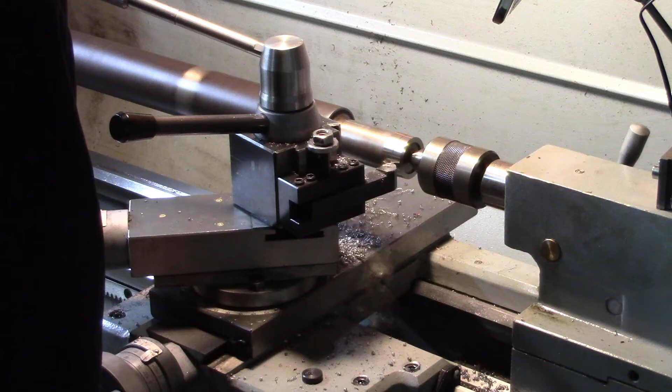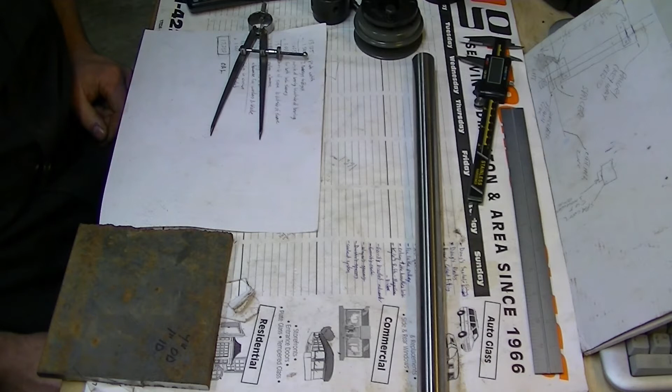Okay, well, for today's project, an uncle of ours has a little bit of a machine he's building. What he's wanting to do is build a concrete cutter using a concrete blade, typical however many inch blade it is. And so we picked up the blade, but he has some pillow block bearings, and we have a piece

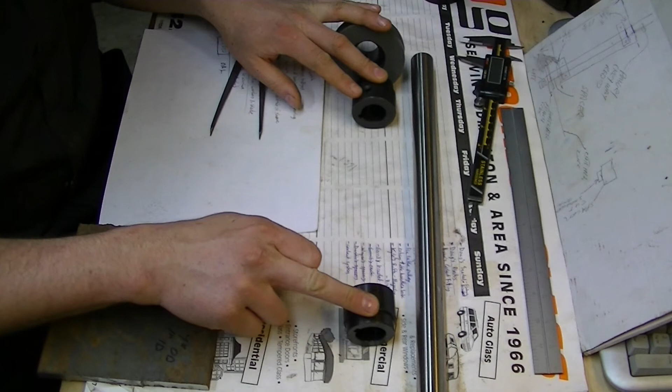of shafting here. What he wants to do is he wants to put the pulley with a keyway on the one end, except he has to space it off from a couple pillow block bearings, using a spacer on the one side, spacer on the other side to the other pillow block bearing, and then we need to make a couple 4-inch slightly concave washers to go on this end to sandwich the blade.

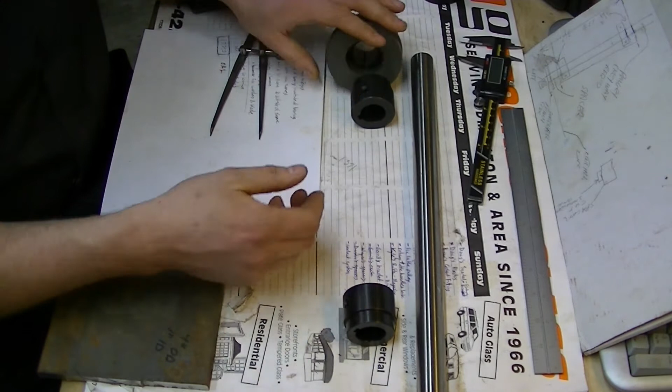Then on this end, outside of that, I have to cut a left-hand thread because of the direction this thing's turning. He doesn't want the nut coming loose on him. So this is what I got for a diagram. He drew it right on the back side of the package for the blade, which is nice because I have the blade to test with.

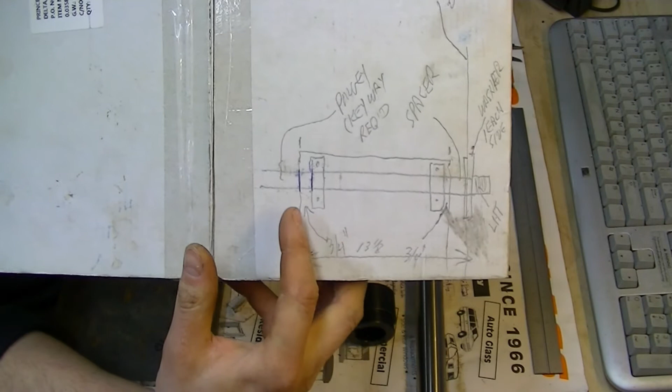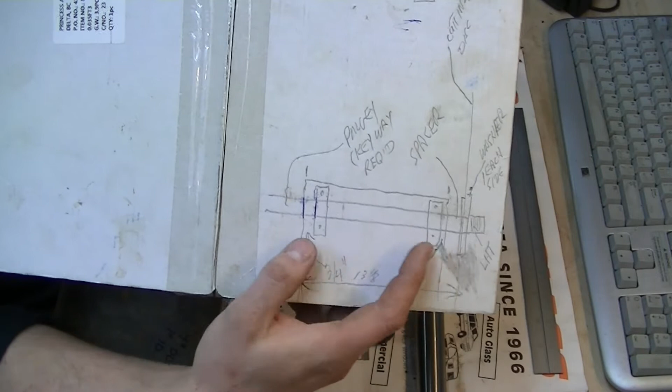So the plate that everything's going to be mounted to is 13 1/8 wide, so 13.125, and then he wants the edge of the pillow block actual bearing portion, the turning portion, inner race, to be 3/4 of an inch from the end. So these spacers are 1 inch to the shoulder, so we'll be turning those down a bit so that we can be a 1/4 inch offset from either side of the plate with the pulley here, with the concave washers sandwiching the blade, and a 1/4 inch off the edge with the pulley edge.

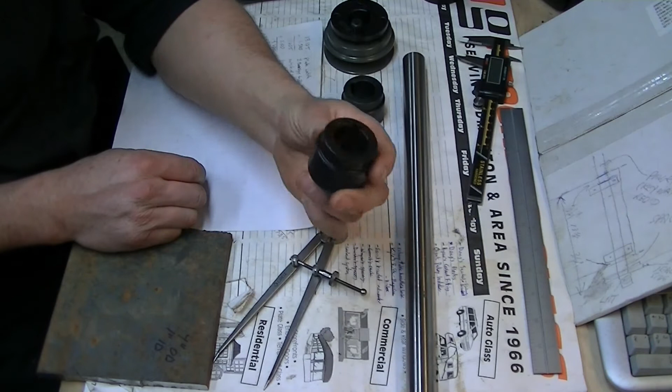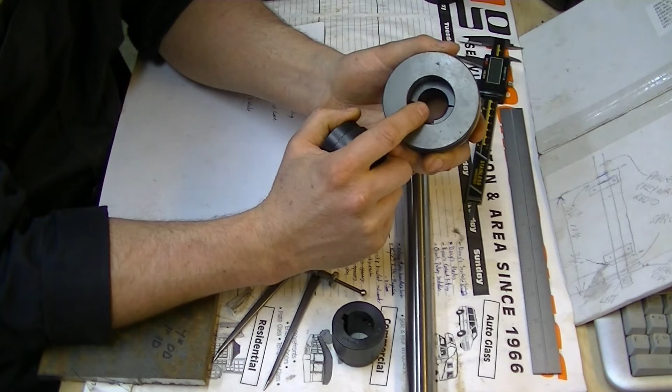So to work with that for the actual measurements, I sat down and did all the subtractions and additions, and it turns out that this shaft we're going to have to cut off to 17 1/4 long, and then this bushing here, it's going to be used as a spacer, that will have to have this shoulder completely taken off. He was wanting that for both of them. However, one thing I think I'm going to do for him, this is about 1 5/8 as far as the outer diameter, and this guy here is just a hair over 1.5 inches. So it's really, really close.

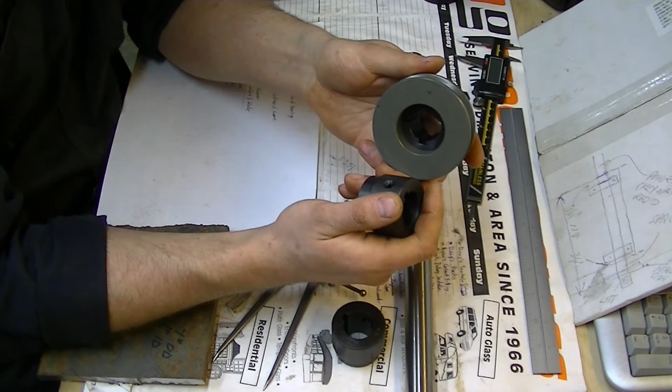What I think I'm going to do is take this and actually turn it down so that it's about 1.5 inches, so it slides into the back side of that pulley. What that'll do is I'll definitely maintain the spacing, but it also provides a little bit more support on the back side of this pulley, because as this taper lock is pulled in, it's not going all the way through that pulley, so this gives it a little bit more rigidity. So yeah, on this shaft here, the one end over here I have to cut down and make a thread on. This end up here, I'm going to have to cut a keyway in.

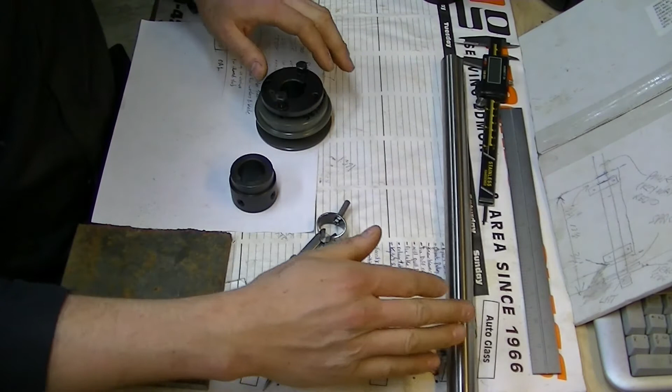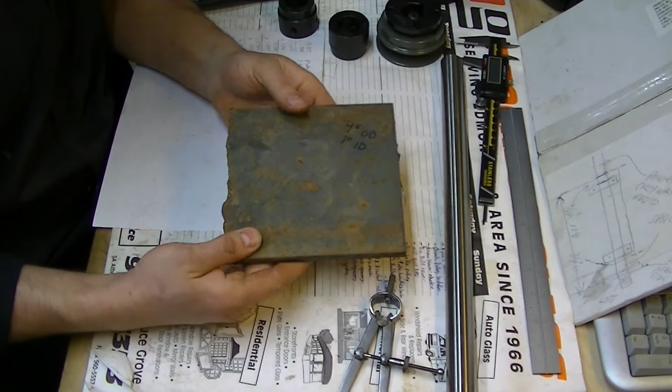As far as the plates, or the washers, he's given me material to work with. So a couple rough cut plates like this, 3/8 inch steel, just typical scrap stuff he must have had sitting outside somewhere. We'll make it look a lot nicer before we're done. But yeah, they have to be 4 inches outside diameter and 1 inch inside diameter hole. What I'm going to do is use a little trick like I used when I made some backing plates for my dad's mini lathe.

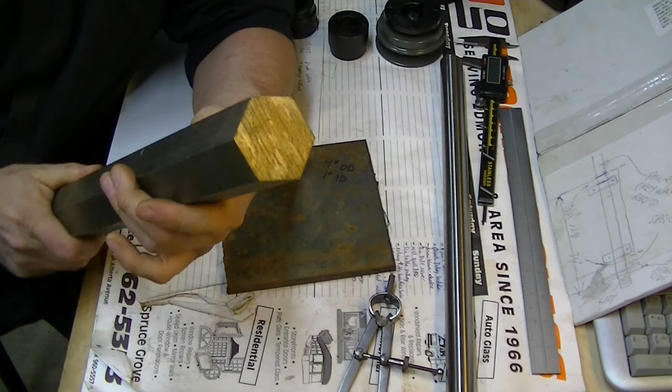As far as making a nut, I know it's a little overkill, but it's what I have in stock. I have some 1 3/4 hex bar, and so I'll just face off the end. I'll probably cut a chunk off, maybe about 3/4 of an inch long, face both ends, and then drill it, and thread it from the inside using a single point tool on the lathe, because I have no left hand thread taps that large. All of my stuff's right hand. So yeah, that's what's up for it this time, and let's get started. We'll start cutting that bar off and finishing laying out these plates.

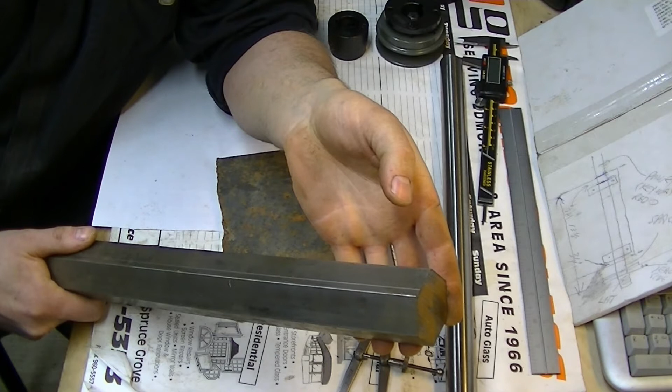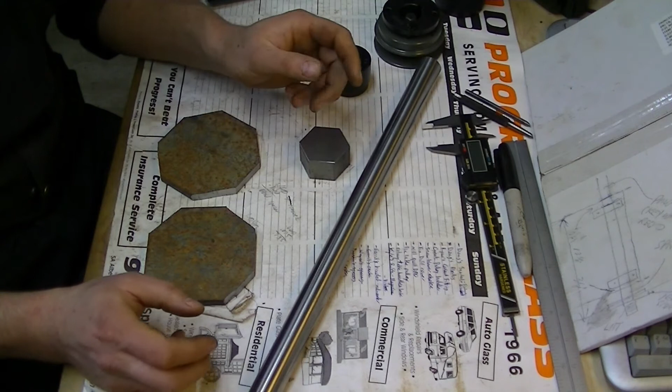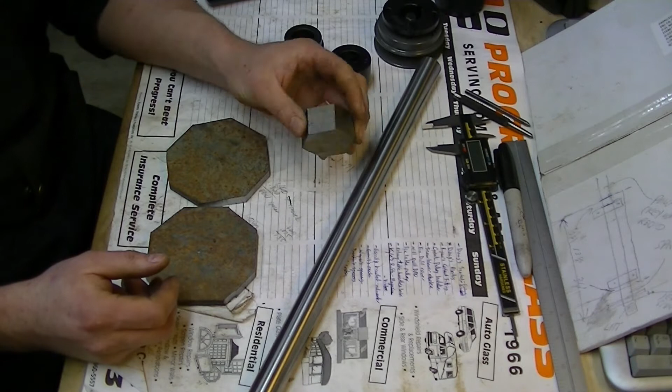Okay, so we got all our parts. The 2 sleeves that they provided me, the pulley, our shaft cut off to just a little over 17 1/4. That gives me a little bit of room to face on both ends and put a center drill mark on each end. And our 2 plates. Like I say, I just used the bandsaw, cut the rough square out, and then used the bandsaw in the vertical position to take the corners off. I also took a 1 inch chunk of that 1 3/4 inch hex bar, and that will become our left hand thread nut when we're done.

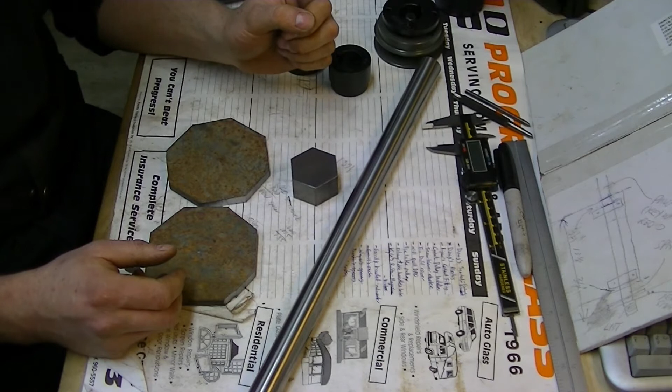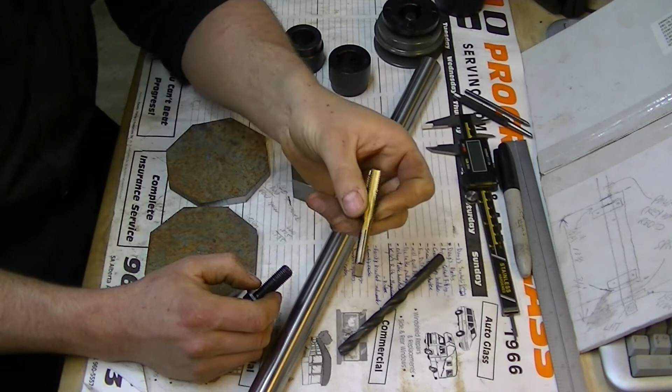So first thing, I think I'm going to do the plates first, or the very, very lightly tapered washers. I still have my center mark here. I'll be drilling it out to a 13/32 hole. So that gives me the right tap drill size, well, close enough, for a 12 millimeter by 1.5 millimeter pitch thread. Because I made this, or well, I modified this bolt a while back.

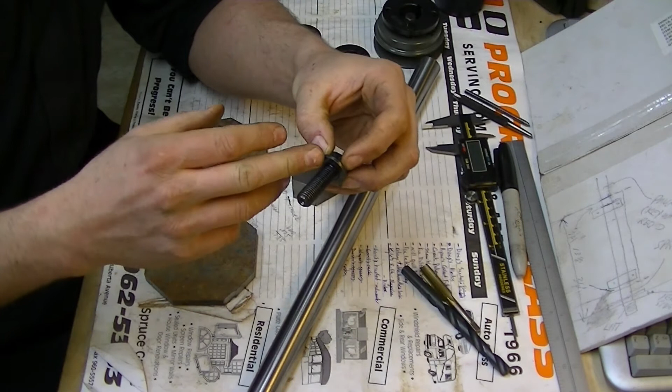I modified this bolt a while back to put a center in the end of it. That way I can use the 3-jaw on one end, the live center on the other, and when this plate is threaded on, I can use that as my arbor to do whatever I want to the front.

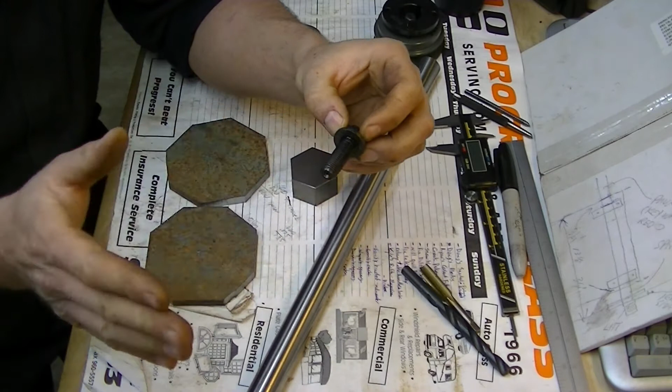What I'm going to do is drill and tap them, mount each one, face that side close to the very center since it's all going to be cut out to 1 inch. Face it to that point and clean it up, and that'll be the back side. Then I can flip it around and cut the outside edges off to make it a circle. Do that to both.

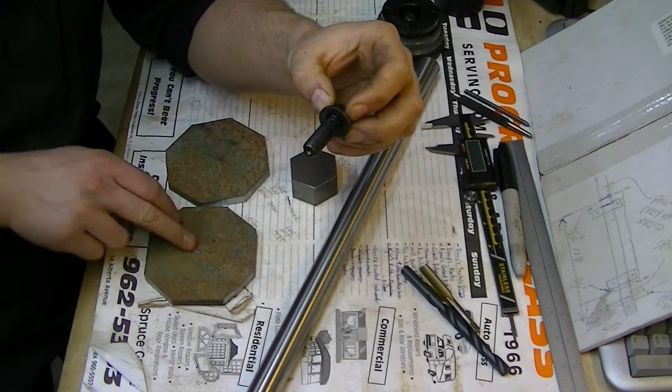Then I can use the outside jaws on the lathe, cut my taper, face this side, cut the taper, and then finish drilling out and boring to 1 inch, probably a couple thou clearance to get over the shaft, the center hole, and the washers. So we'll do the washers first.

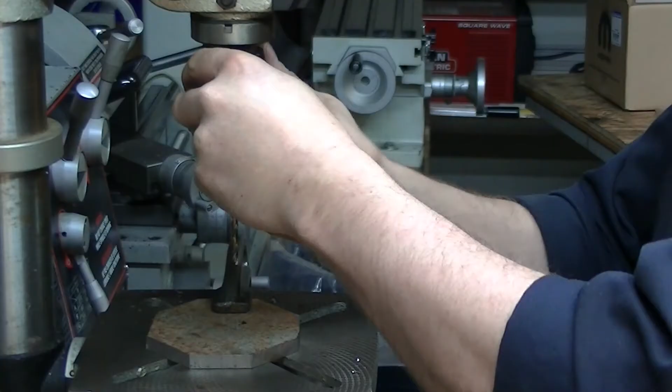Make sure you're in the right spot. There we go.

Again, this isn't the most critical of tolerances. If I were having to be more precise, I would have just done it in the mill. But the mill is still clean, and I didn't want to have to clean it again just for doing a couple holes.

I don't know, it just seems like the older I get and the longer I'm a mechanic, the less feeling I have left in my fingers, and I keep dropping things. I see John doing that too, and I wonder if it's just a normal part of the trade, because I have less feeling in my fingers than I know I should. You lose the feedback pressure and heat. I can sometimes pull stuff out of the oven without actually using oven mitts. Believe me, I'm not bragging about it, it actually kind of concerns me. And I don't have that much feeling.

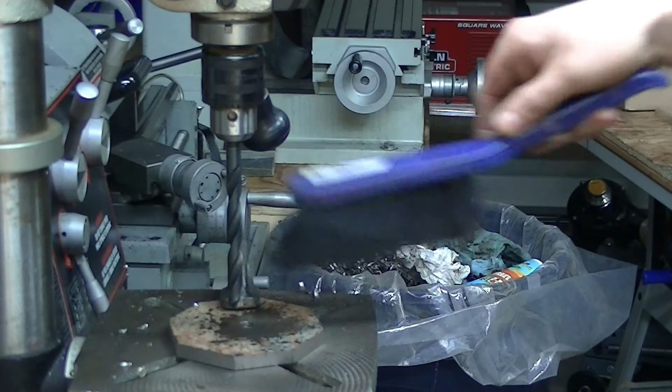There we are. Alrighty.

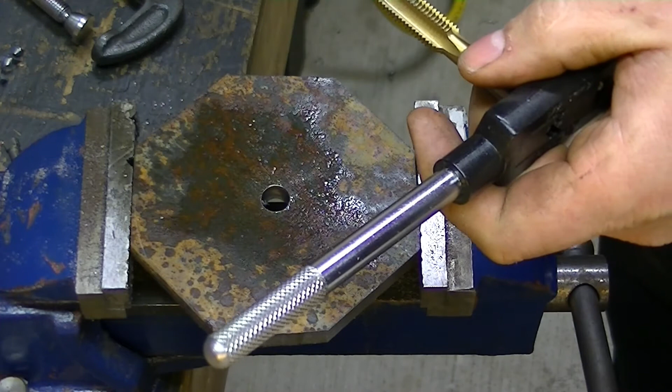The concept of tapping is certainly not new to most people on YouTube who are doing machining stuff, but I just figured to show what I'm doing here. The trick is getting it straight to start. If you get it straight to start, you're laughing.

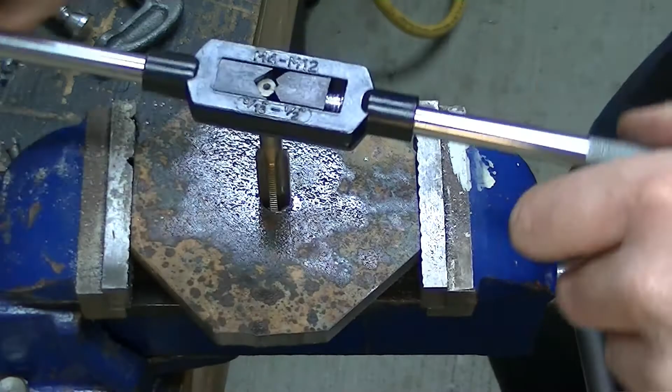This is only a temporary hole anyway, so it just has to have threads to hold the bolt that I'm using as an arbor of sorts. Again, I don't really do things in a complex manner here, just simple building parts for friends and family.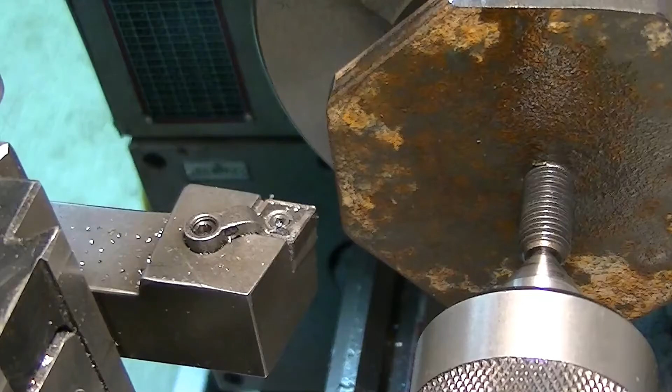Okay, so I've got the plate mounted up on the bolt, with the threaded hole mounted in the 3-jaw. I've already taken one pass just to make sure I'm reasonably close. A couple passes here with the bit. It is an interrupted cut, so unfortunately there's going to be a bit of vibration on it. But here goes, I'll show you how it works.

I'm only doing about 10 thou depth of cut. On a bigger machine I could probably do a heavier depth of cut, but this isn't that big of a machine, so you work within your limits.

Yes, I know there's a little bit of run out in the actual plate itself, I can see it from where I'm standing, I don't know if you can see it on camera. That just has to do with the fact that my threads weren't perfectly square. I couldn't start the threads without adjusting the table on that drill press, and unfortunately with those little drill presses, the table isn't that solid, so I ended up having to use extra bracing, and it's a real pain to move it.

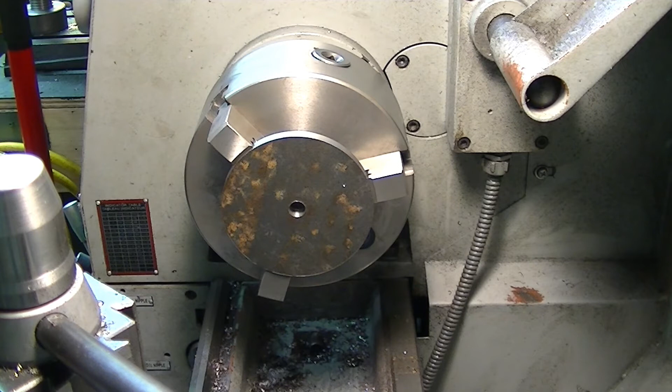So what I'm going to do right now is start by setting my compound rest to almost square, but just with a little bit of taper to it, just to allow for dishing the center.

All that was for was just to get a rough skim. Yeah, I'll take one more.

That'll work. Now, you can see that's the very center, the farthest forward that the compound slide will move. That's the end of its travel.

I use this tool for all sorts of stuff. I really like the CNMG tool holders.

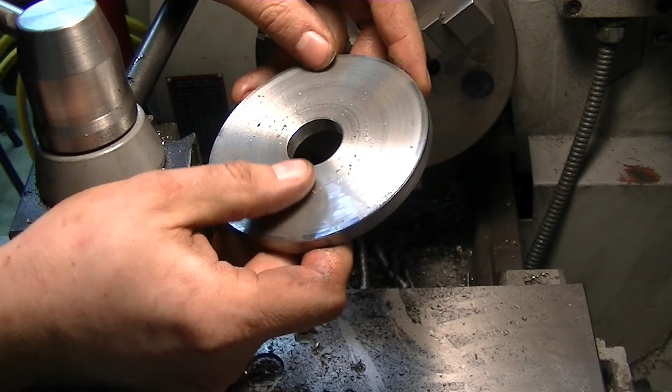So now, there we go. Slight dish toward the center, chamfer toward the center. The outside 1/8 inch to 3/16 or so is still parallel to the back.

Take that burr off. You're good to go.

I'm going to try turning down the one for the pulley first, because that way if I mess it up, then I can just completely clean it off, and that gives me a second chance.

Change my angle of my tool here.

Alright, I do need to shorten it a little bit though, just so there's the possibility as that tapered bushing, the tapered collar, goes in. I need to shorten this because there may be a possibility of this little shoulder interfering with the drive bushing, the key drive bushing that is tapered where it goes in.

That tapered drive bushing has to push further and further inside the bore of that pulley, and I don't want it to interfere. So we're down to about 1/4 inch. That'll be enough. Change our angle on our tool so that you can come up to that shoulder.

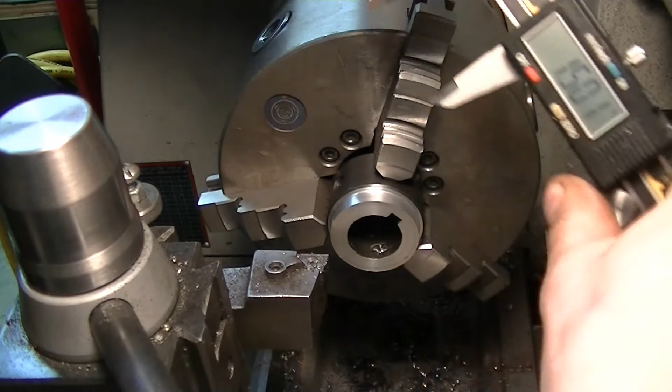That's 40 thou. The inside of that hole is 1 inch 546 thou or so. 1 inch 585. 1 inch 585, 1 inch 546, 47. So we need to take another 40 thou off.

Again, I'm going off the dials, which on this machine are close. A little bit more.

Thou on the way out. There we go. That's it right there.